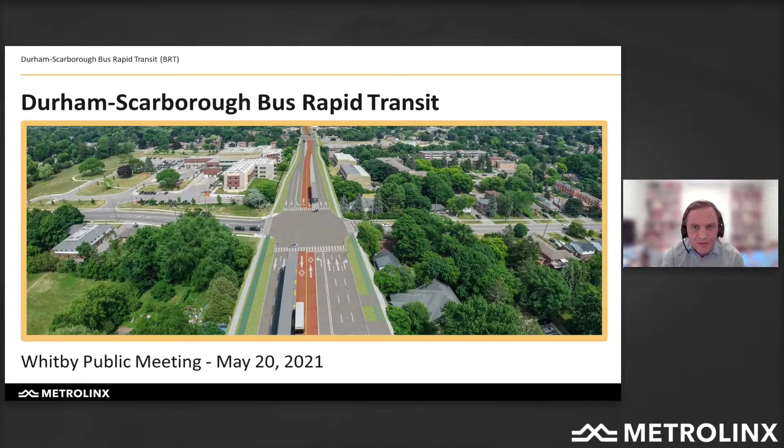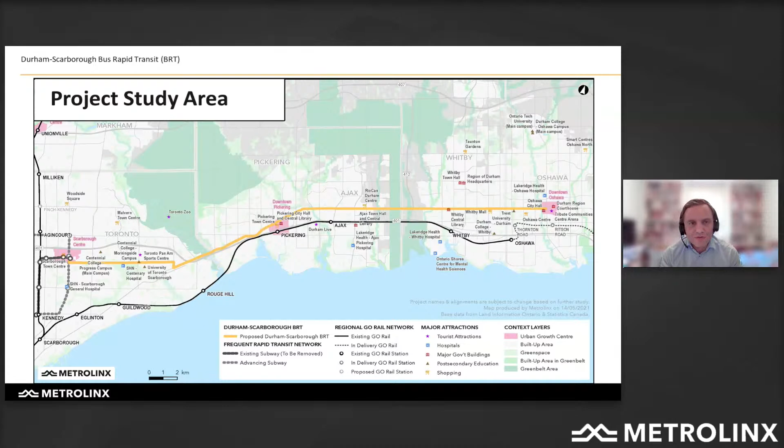So just a quick reminder, this is one of 3 large BRT projects in the 2041 Regional Transportation Plan. It's a 36-kilometer corridor destined to go through the urban growth centers all along Durham region and directly into the eastern part of Toronto, to Scarborough and all the amenities there. So it doesn't have the same function as the rail line. Part of it runs parallel, but it really hits a lot of different destinations and will support different types of customers along the way. Next slide, please.

So in 2018, we published what we call an initial business case, which is the first evaluation of what that project can deliver in terms of benefits for the region. We saw that in terms of economic benefits for the region, calculated in terms of how much time people save, how much benefits are for the businesses along the way, for the economy as a whole.

This project delivers almost $700 million of economic benefits, mostly in Durham region. That yields what we call a benefit cost ratio, with the cost being approximately around $500 million for that entire corridor. The economic benefits that are generated outweigh the costs, and that's also what has driven the decision to continue this project forward, because it does adequately support the growth of the region.

Other benefits we're looking into for this project are, first, the greenhouse gas emissions produced. We expect that this project will give more choices for people to move around the region, and will enable car users to better use transit because it will be more convenient for them. That will save over 160 kilotons of CO2. It will save time for each rider, 9.5 minutes per rider on average. And then a reduction in average bus delay, which is very important - the reliability of service will be radically improved because of that constant flow of buses. They won't be bunching up, they won't be stuck in traffic, and that can save about 10 to 15 minutes time for each rider.

Next slide, please. And this is also supported by current ridership trends, and maybe I'll hand it over to David or Bill to tell you what's already happening today on that corridor.

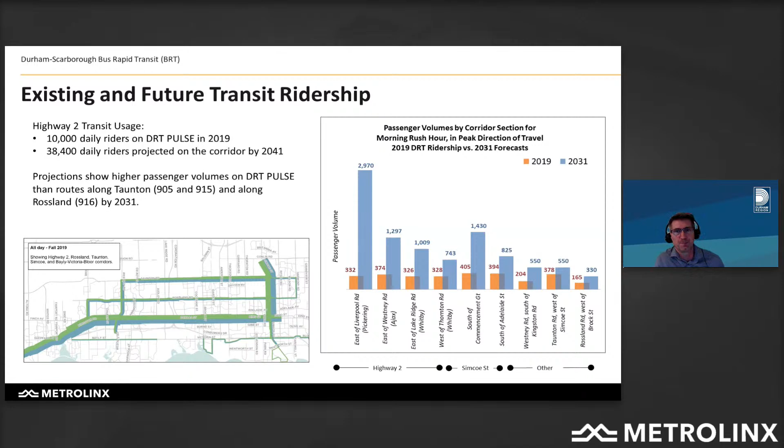Next slide, please, and I will pass it off to David Hopper. I'll take you back — I thought I was doing the project timeline, so I'll take it back. So in terms of the overall project timeline, we're there.

It started in 2019 with a public engagement on the overall objectives of this project. Then it continued at the end of 2019 with a presentation of a first set of preferred designs. And then this is where we are right now, after having presented a second set of designs in November of 2020, and now continuing with a consultation.

This is leading to an environmental assessment, and then there will be further public engagement on the specific environmental impacts that are also important — that includes noise and vibration, for example. I saw there's a couple of questions on the Slido board that will be addressing that. The environmental assessment also looks at a whole other set of impacts the project might have that are important for residents and neighbors.

Beyond that, once we move into 2022, and into first the preliminary design and then detailed design, that will be the opportunity to continue the consultation on detailed, very specific issues along the itinerary to respond to the community's aspirations.

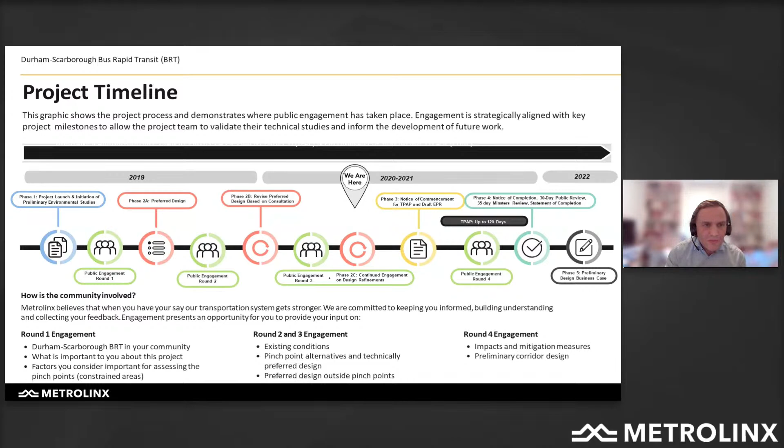And then maybe the next slide — I'll hand it over to Raj to talk in a little more detail about consultation to date and how it's expanded throughout that journey as we build the project.

Great, thank you, Mathieu, and good evening, everybody. So as Mathieu mentioned, consultation has been ongoing since 2019 and has included three public information centers. We've hosted public virtual open houses, much like we're hosting this evening. We've hosted meetings with stakeholder and community groups and associations, and of course had council presentations.

We've also been actively engaged with elected officials along the entire corridor. Specifically, Whitby MPP Lorne Coe has been briefed on the status of the plan and consultations to date. His concerns have been on the impact to area residents and businesses, and he has encouraged us to do deep consultations with the community and council, which we're doing. We've also presented at several council meetings in the past, and we will continue to meet with the community, business, and elected officials going forward, as Mathieu had already mentioned.

Let's go to the next slide, please.

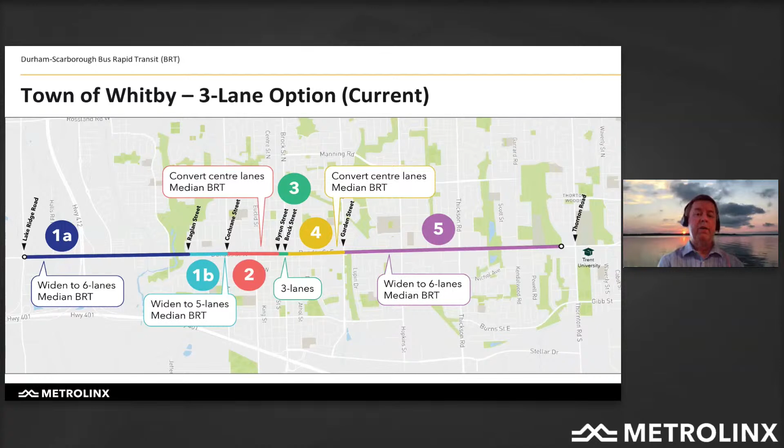In Zone 2, we will keep the existing 4 lanes, but convert the center 2 lanes to BRT. Zone 3 will be the 3-lane option we'll discuss in more detail shortly. Then we see a mirror pattern in the east part of town, where between Brock Street and Garden Street, the 4 lanes would be repurposed with BRT lanes in the middle and a single lane in each direction on the curb. East of Garden Street, the road widens from 4 lanes to 6 lanes with BRT running in the middle.

The reason the road changes is because downtown has a much narrower road, and like the other pinch points, we're looking for unique solutions that match each neighborhood. As we get out of downtown, we see higher traffic volume that needs to be handled, which is why we're recommending more traffic lanes towards the east and west ends of town. This also matches what's happening in Ajax, Pickering, and Oshawa.

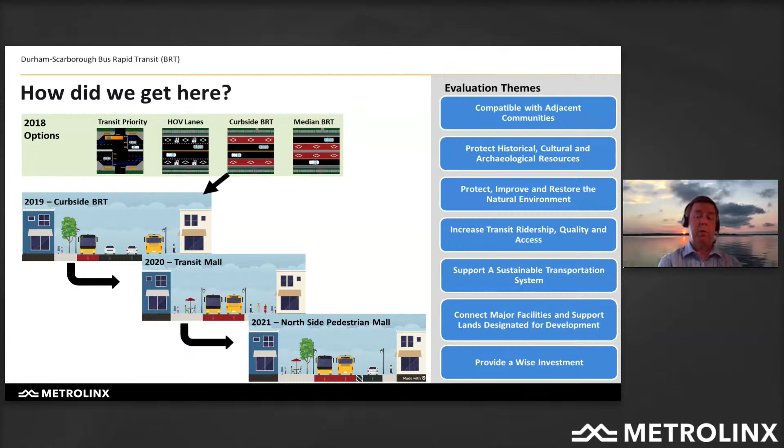So the curbside option, it did accommodate transit, it did avoid impacting the buildings, it did have minimal impact on cultural heritage, but there was concern about pedestrians, public realm, concern about impacts to the local neighborhood, to the library and Celebration Square in front of it, as well as the loss of on-street parking. Town staff asked us to look at high occupancy vehicles again, to look at a lane reversal system where we would have 2 lanes in the peak direction and 1 lane in the off-peak direction.

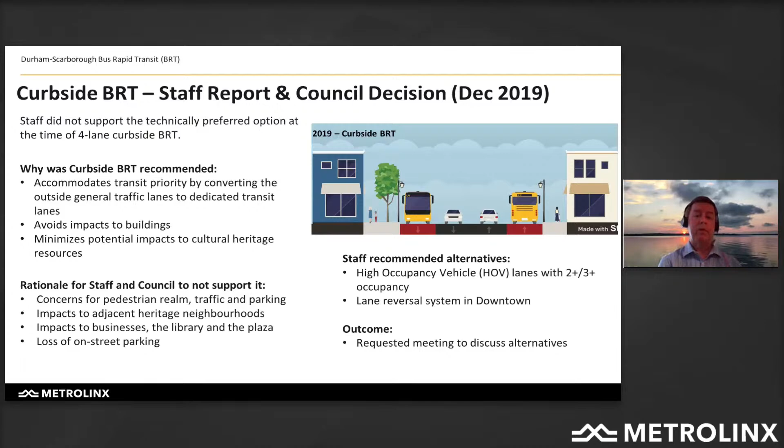And the outcome of the staff report, as I mentioned, was for us to discuss those alternatives. So here again, we see about the transit mall. Here we see a much improved public realm, a greater emphasis on transit.

We felt there was a reasonable impact of traffic infiltration on the neighborhood, given the patterns that we're seeing, that 80% of the traffic on Dundas is local traffic within the town that could find a portion of their route on alternate streets, which they're already using. And we also found a replacement for the parking at a new lot or an expanded lot at Byron and Elm.

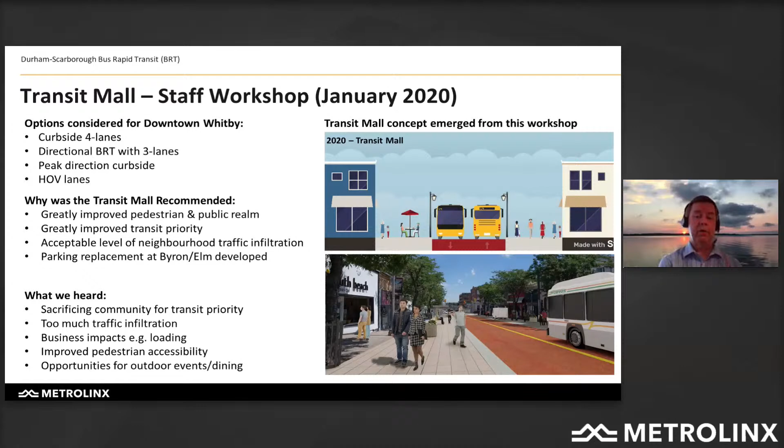What we heard, though, was that was still sacrificing too much of the community for transit priority. There was too much traffic infiltration and business impacts, as well as the opportunities that were being created were not balanced against the neighborhood concerns.

So as I mentioned, this led to the North Side Pedestrian Mall, and the idea here was to try and balance things off and provide some benefit by widening the sidewalk on the north side, which would allow improved accessibility to those businesses to ramp up for the one step at the door.

There was still some concern about traffic infiltration, but it was still greatly reduced from what we saw before. There was still a concern about westbound for trucks and school buses going through, as well as trying to balance the width of the sidewalk on both the north and the south side of the street. So from that, we've refined the option again.

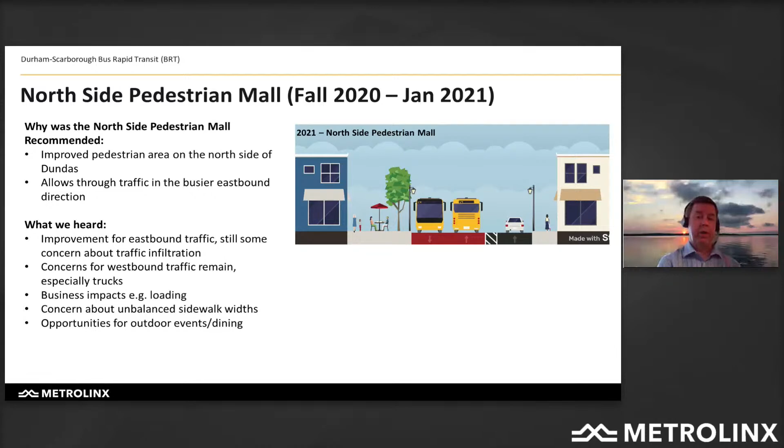And here is the option that we believe now is the appropriate balance of all of the needs in the community. This we're calling the 3-lane option. So what we see on the plan here is in the eastbound direction, we have a dedicated traffic lane in gray on the bottom all the way through.

We have an eastbound BRT lane, which would come through and serve a stop shown in blue on the east side of the intersection for the eastbound passengers, who would then cross to and from that via the crosswalk at the signal. In the westbound direction, as far west as Perry, we would have the traffic operating in its own lane on the curb and the buses operating in their own lane in the middle of the road.

West of Perry Street, the cars would merge into a shared lane. We would also maintain the right-hand turn from westbound Dundas to northbound Brock because it's a fairly heavy move. The mixed lane of traffic and buses would go through the intersection.

Buses would stop at the Blue Island stop or the sidewalk stop on the far side. And then once getting past Byron Street, cars would transition to the curb lane and buses would move into their own lane. So we would be shared for about 150 to 180 meters through here, and we would be able to balance all of the concerns.

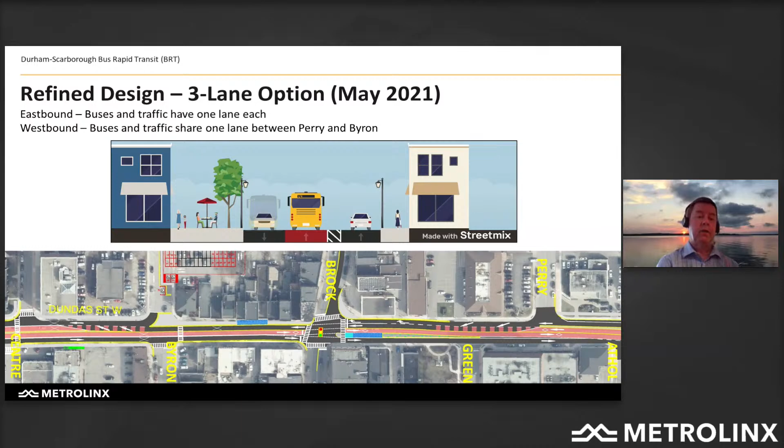It would allow for trucks and buses to go straight through. We can see the parking lot at Byron and Elm to replace the on-street parking. Can I have the next slide, please?

So this option has a lot of benefits. It does improve by allowing some widening of the sidewalks. We're still looking at how we can balance that between south and north. It does maintain good transit reliability because we only mix with traffic for a very short distance. We do have the continuous eastbound and westbound general traffic lane, so trucks and buses, as well as most of the traffic, can keep moving through. This significantly reduces the amount of neighborhood infiltration. It will improve the access to businesses and pedestrians for the downtown core. It provides more opportunities for streetscaping and enhanced public realm. It has no impact on the heritage character of downtown.

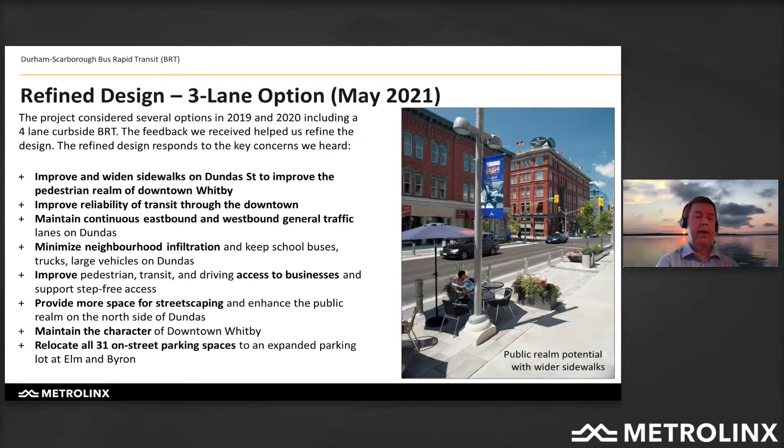So if we go to the next question, the next slide, please.

What we have heard about this is that the idea of moving the 31 parking spaces to Byron and Elm is a good solution, particularly if we add a crosswalk at Byron so that those people can get to and from the south side of the street. The eastbound traffic is a fairly good solution. It allows for one through lane all the way across. Having the mixed lane westbound solves a lot of the problems, particularly for trucks and heavy vehicles.

There is still some concern about where the stop is on the west side, and we agree that there could be some fine tuning. Ideally, we want it close to Brock to allow for transfers to the north-south bus route, which serves the GO station. If it goes a little bit further west, that might allow more cars to follow the bus through the intersection as the light turns red and not block the intersection.

We've also looked at moving it to the east side in front of the bank. The challenge there is if we do that, we cannot have the right turn lane as well as the through lane, and that would mean more traffic that is turning north on Brock Street would choose Hickory, Ash, or Perry to work their way through the neighborhood in lieu of staying on Dundas and Brock. So there's still some work to be done in fine-tuning this, but we believe this is a good balance in terms of public realm, business access, transit priority, minimizing traffic infiltration, and serving the entire community.

Could I see the next slide, please?

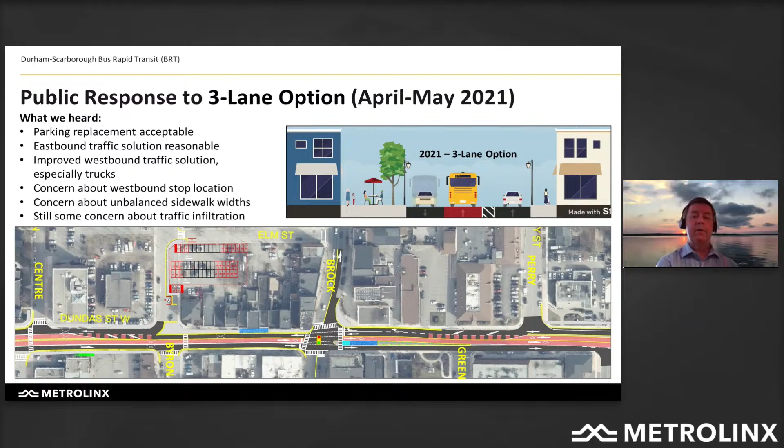So yes, in terms of public response, could we move the stop further west? Could we replace it with a bus bay? The challenge with a bus bay is that if the bus pulls out of the lane to serve the bay, it has trouble getting back in. And one of the things we're trying to do here is minimize those kinds of delays. That is a significant delay along any bus route is using bus bays.

Trying to balance the width of sidewalk on the north and the south side. We are trying to see if there's a way to fine tune that. The challenge is matching up the lanes on both the north side of the road and the south side of the road, but we can look at that in more detail. As I mentioned, relocating that stop to the east side of Brock, which we think has some issues in terms of driving traffic up Perry Street, where there is a daycare center, as well as driving through the local neighborhood. And so we're interested in some of your thoughts on these considerations and how we might fine tune this design. Can I have the next slide, please?

In the first staff report, and in fact the second staff report from the town as well, we were asked to look at a couple of other options, some of which we'd already looked at before and have gone back to. One is a mixed traffic operation where we would simply have a single lane eastbound and a single lane westbound with buses and cars mixing. The challenge there is as we introduce more mixing, we have lower priority and more opportunities for the buses to get jammed up and losing the reliability that are the cornerstone to this project being a success.

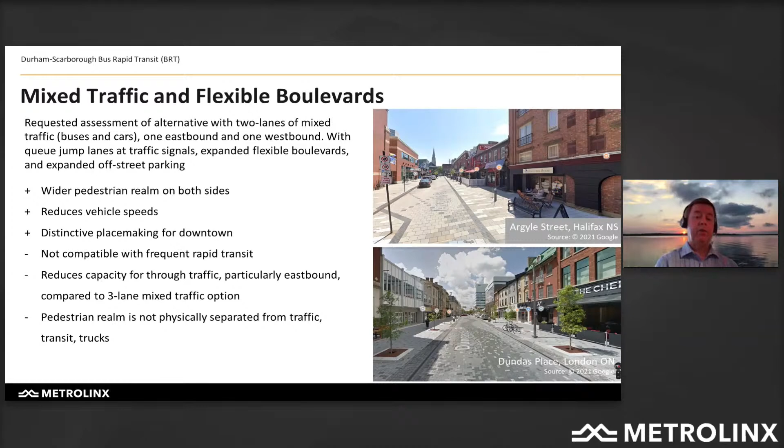The next slide, please.

We also looked at the 4-lane curbside, as I mentioned. The challenge here is having the buses right against the narrow sidewalks and losing some business front access. We did look at the 2-lane mixed operation with the 2 mixed lanes, but again, we lose a lot of the transit priority, particularly if this becomes longer than 1 or 2 blocks, as well as the friction for mixing buses and cars together and then separating them out.

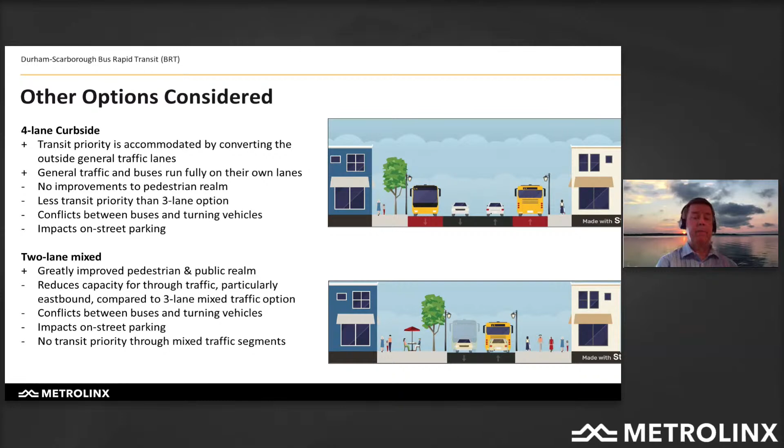Go to the next slide, please.

We also looked at some more hybrid solutions. One was a lane reversal system where we could have had 2 lanes westbound in the morning and 1 lane eastbound, then the reverse in the evening with 2 eastbound and 1 westbound. The challenge here is telling drivers and everyone using the road which lane is for which purpose, since the purpose changes during the day. You see that sometimes on bridge approaches, or locally on Jarvis Street in downtown Toronto. The challenge, as you can see in the upper right photo, is the overhead signage needed to make that system work safely becomes very visually intrusive, and we didn't feel that worked with the heritage character of the downtown.

The other option was, could we have a single reversible BRT lane in the center, as in the lower picture in Eugene, Oregon? The challenge here was providing the stop at Brock Street, because we need places for people to board and alight from the buses, and if an eastbound bus is handling passengers, a westbound bus can't get through. As we see more frequent service by 2041, the single lane option really does not provide the capacity and reliability that we need. There's also some possibility of driver confusion, because sometimes the bus is coming along beside you and sometimes it's approaching from the other direction. It's also challenging for passengers to know where to wait for their bus.

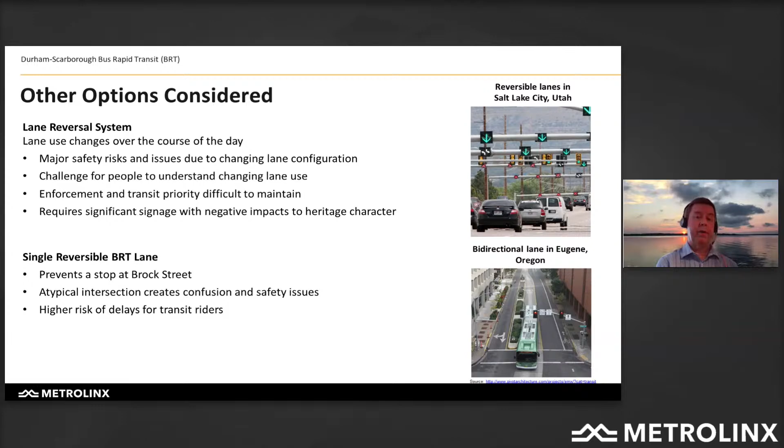The next slide, please.

So just to recap, the solution in the west end in zone 1A is to widen from 4 lanes to 6 lanes, with dedicated BRT lanes in the middle with a solid median down the road. All left turns across the street into driveways and side streets would be restricted to U-turns at signalized intersections, with a dedicated U-turn phase that's protected without other vehicles moving to turn around and go back.

In 1B, we would narrow down to 1 lane westbound, which we believe can be handled from Cochrane out towards Raglan. In zone 2, we're showing the 4-lane solution with buses running in the median and cars in the curbside, the 3-lane option in zone 3, and in zone 4, 4 lanes with 2 bus lanes and 1 lane of traffic in each direction. Garden serves a major distribution purpose on the east side of downtown, so we see the traffic volumes there warrant having 2 lanes of traffic in each direction. We're widening to 6 lanes, including replacing the CP rail bridge.

When we get to the Oshawa border, the median lanes continue as far as Waverley, where we split to the one-way King and Bond. At the west end from Lakeridge, we continue with median BRT lanes the entire length of the corridor all the way to Scarborough Town Centre.

Have the next slide, please.

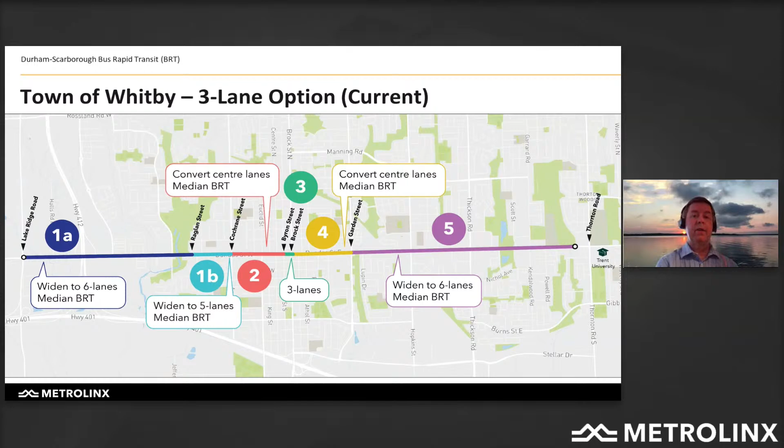In a little more detail, when we were looking in the West End, we see about 1,400 vehicles per hour, which can't be handled by 1 lane of traffic. We think, though, that between Cochrane and Raglan, this traffic is a little bit lower, partially because it's traffic turning right off of Cochrane and coming westbound on the single lane from Dundas, so we believe we can make that work. We need to widen out before we get to the traffic light at McQuay to be able to make that light function properly.

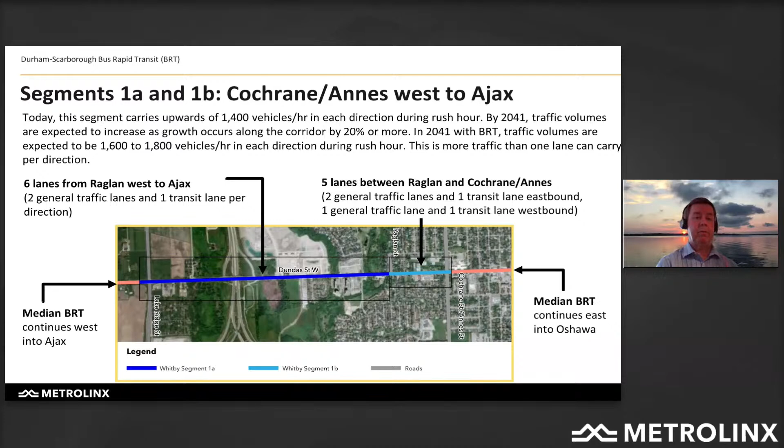Have the next slide, please.

So this is an image of the road today. We're looking east along Dundas Street at Annes Cochrane, and the next slide will show our rendering of what it could look like in the future.

So we see the 2 red BRT lanes in the middle, with far side stops served by crosswalks at signalized intersections. We're looking at providing continuous sidewalks along the corridor and, wherever possible, continuous cycling facilities. Through downtown, this will connect to a dedicated bicycling facility provided by the town along Mary Street, because the downtown core is too narrow to support cycling independent of the facility. Can I have the next slide, please?

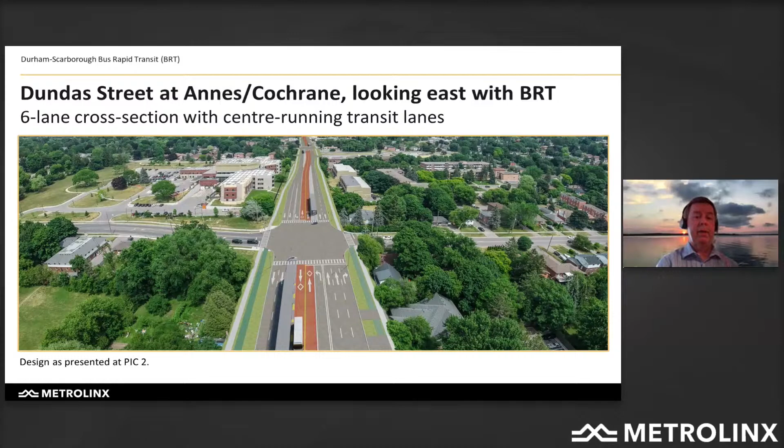There's also a challenge at Celebration Square at the corner of Euclid and Henry. The challenge here is that we need a stop to serve both the library, the high school, and other activity centers on Henry Street. We also need to maintain the left-hand turns and U-turns on and off Dundas Street. To do that and provide the bus stops, we have a challenge with a heritage building in the northwest quadrant at 500 Dundas. We have the retail buildings on the northeast quadrant right out to the sidewalk, and the library set back with the square and the urban filter.

So we looked at a number of options here, 5 different ways to do this. Could we put the bus stop on the east side? Could we take away the left turn lanes? Could we move the stop over to King Street? What we're really seeing is that the best opportunity is to move the urban filter back between 3 and 5 meters and allow this design to move forward. It does make Celebration Square marginally smaller, but we believe that is the best balance of options here. That's something else we'd like to talk to you about.

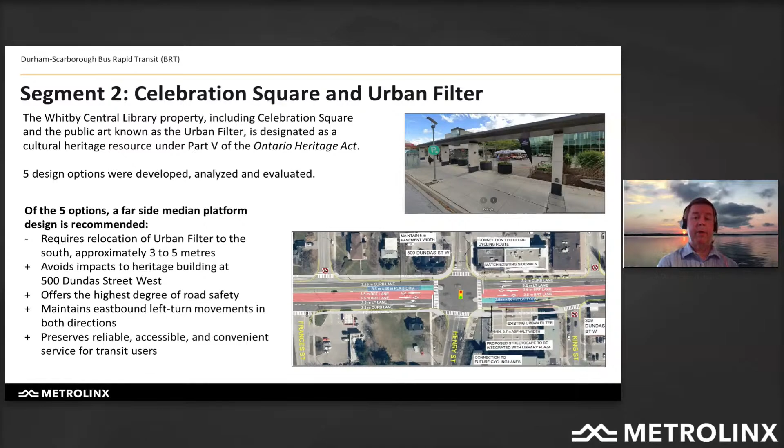As I mentioned, sections 4 and 5 are the 4-lane option as far as Garden, then widening out to 6 lanes with the replacement of the CP bridge. Again, it's because we see a lot of traffic turning on and off Garden Street that bumps up the traffic volumes to be larger than what 1 lane can handle. As well, the CP track cuts off a lot of cross streets, and Dundas really is one of the major ways to get in from the east end.

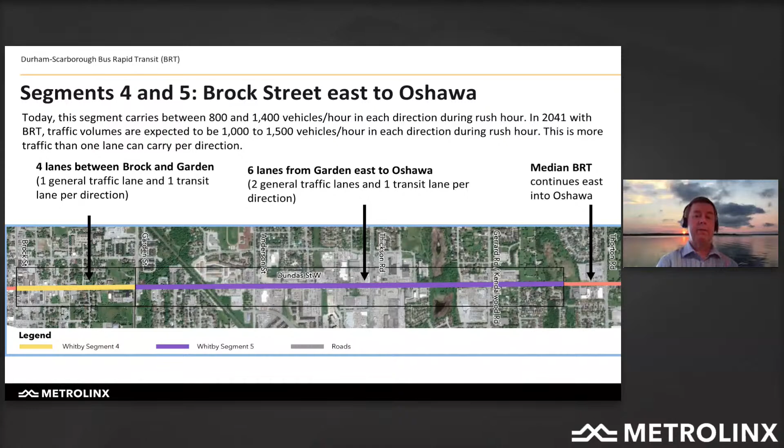So the next steps are, based on a preferred design, we can prepare the environmental project report, which will evaluate all the environmental impacts on cultural heritage, noise, vibration, and environmental aspects. We'll provide an update to Whitby Council and Durham Region Council on all the recent refinements and how they respond to the feedback we've received from the community.

Then in the summer we will commence the transit project assessment process, that's the environmental assessment. There will be a specific dedicated public consultation period on these elements, focused on the environmental impacts and the mitigations. That will enable us to finalize a preliminary design business case by the end of the year or early next year, which will recost the entire project, analyze and tally all the benefits, and make the best case for this project to the different funding organizations.

After that, consultation will continue during the detailed design. David mentioned a number of refinements that we're committing to review during that stage, including the platform design, the platform location at Brock and Byron, where we've heard a lot of questions on how to prevent cars from being stuck behind the buses there, as well as sidewalk width to balance things out between the north and the south. These are detailed design elements we're committing to continue consultation on beyond the environmental assessment.